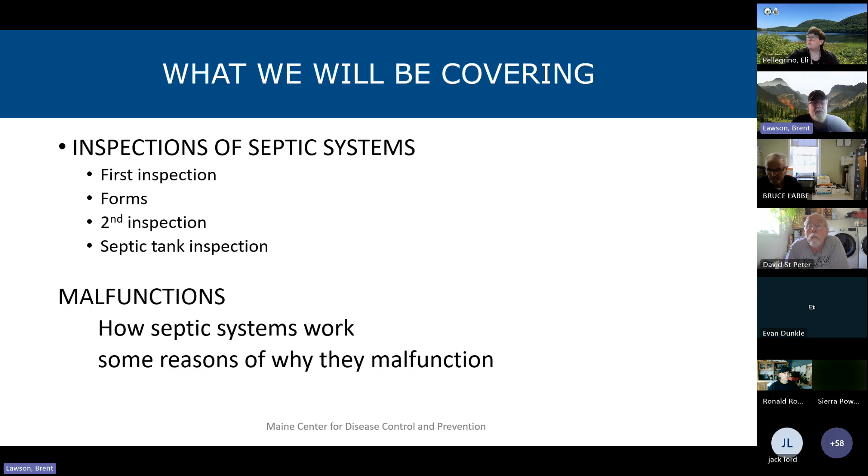But this time, the 2023 rule changes are going to be included, so that'll be a part of the inspections and installations as well. So I guess we'll get going. I guess we already went over what we'll be covering. Basically, that's what it is. There's going to be some malfunctions in here, why they malfunction, and issues like that.

So before we even get started, basically, the plumbing inspector has to be notified at least 24 hours in advance. A lot of times the plumbing inspector will act before then if they have time. There is no limit to how long a plumbing inspector can take to get to the site. And this is because of all the LUPC territories.

A lot of times the plumbing inspector that is in charge of those territories doesn't live right next door, so it takes a while to get up there. And I think a lot of times plumbing inspectors and the contractors that work in the area know this. So hopefully they notify the plumbing inspector well in advance, when they think they're going to be ready to do it. So that really hasn't been an issue. Only a couple times when contractors can't get a hold of the plumbing inspector. But we try to do our best to rectify that situation.

So, preparation for the inspection. As far as the installer goes, they've got to be prepared. I mean, they've got to offer equipment and tools for the plumbing inspector to do their job. It says that right in the rule book.

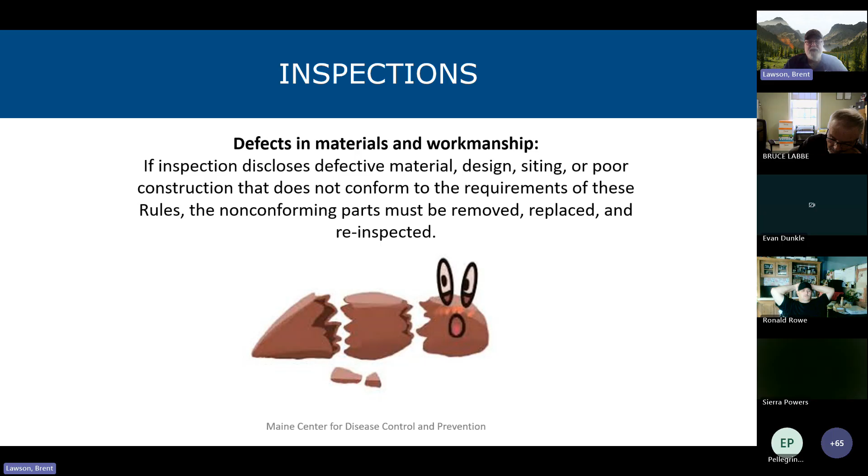So you cannot put defective materials in a disposal field, or actually even a tank or a D box, anything like that, a pump station. If there's a defect in that someplace, that's going to be replaced.

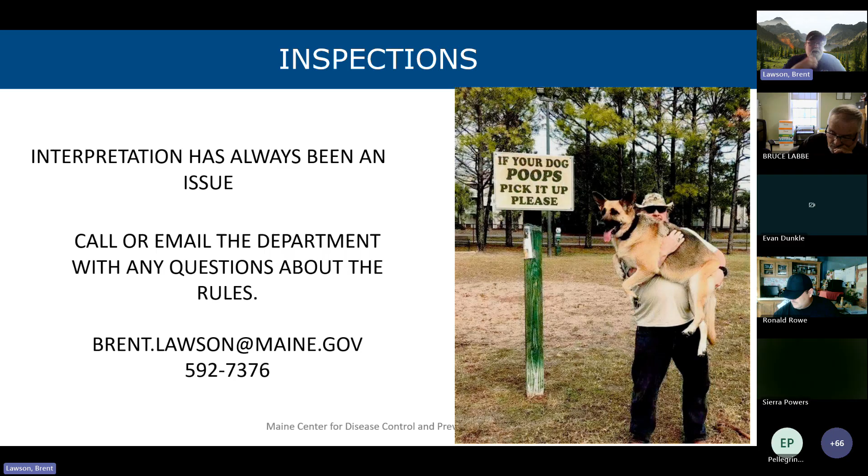So if you need clarification on anything, just feel free to give me a call, or anybody in the office a call, and that's my email address and my phone number. That's why I'm here. Feel free to give me a buzz anytime you like, and we can go over any questions that you have.

So, inspections. The LPI must make 2 inspections as follows. The first inspection is basically after the site preparation. So you've got grubbing, which is taking the grass off. And again, that has to be taken off of where the entire disposal area is going, which is the footprint, the shoulder, and the fill extensions. That all has to be grubbed and prepared.

As far as the inspections go, you do have your code book, as we all know, for what they're supposed to be doing, but you also have the design. We'll touch base on this a little later, but for instance, if the design says 15 inches of stone, but the code only says 12, you've got to inspect it according to the design. So make sure you realize that, and what the site evaluator is designing it for.

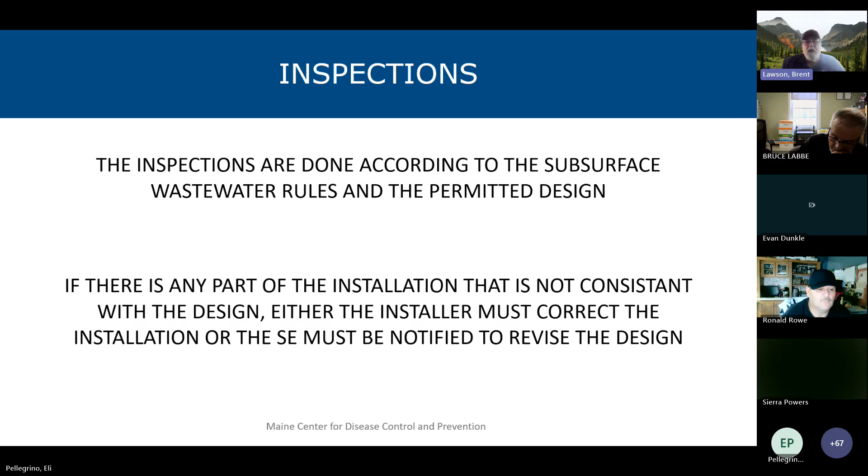Any part of the installation that is not consistent with the design, either they must correct it, or they have to call the site evaluator to revise their design. So again, just make sure you're well aware of what the site evaluator is designing according to the rule book.

Erosion control has to be put up before any work has started. John McLean at DEP has numerous dates for erosion control classes. I suggest you take one of those if you haven't already, especially the contractors, to become a certified contractor. And I think we'll touch on this later on too, but you need to take this course. We used to put out 8-hour courses, but now they're 4.

And so we require one of these courses plus a John McLean course in erosion control, and then 2 front pages of the HHE 200 form that the contractor has installed, signed off by the plumbing inspector. So those 2 certificates, those pieces of paper, and the form you fill out to become a certified contractor are what we need to put you in the database and get you as a certified contractor.

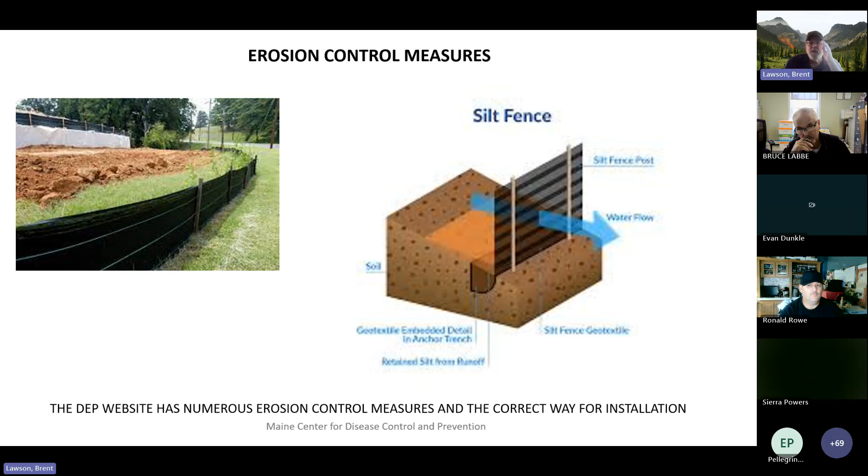Inspection. Hold on. So, building drain, which is 24 inches. Even though that's outside of the structure, that is still considered internal plumbing. There had to be a cutoff point someplace, and that's where it was. So 24 inches outside of the structure is still internal plumbing.

So as a septic system installer, you cannot go past that 24 inches because you're not a master plumber. If you are a master plumber, yes, you can go put it right through the wall of the cement or between the posts or anything.

What we're going to be trying to do is with Nick Adams, who is the lead of the Plumbers Examining Board. Hopefully sometime this summer, I'm gonna make a suggestion to have the septic system installers be exempt from at least putting it through the wall of a foundation. Because, let's face it, it's being done anyway, so I might as well make it legal. It's not hurting anything, but it's not to code. So if we get them exempt from doing this, then we'll be all set. So that's what we're going to be trying to do.

So first thing you need to do, first inspection, make sure it's permitted, of course, because you're not going to go inspect something that's not permitted because it's not authorized to start work on it. So there shouldn't be anything that you should be inspecting.

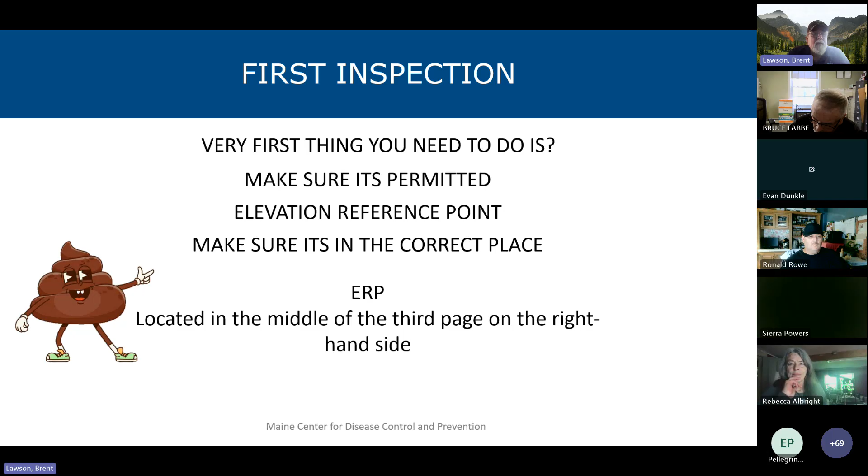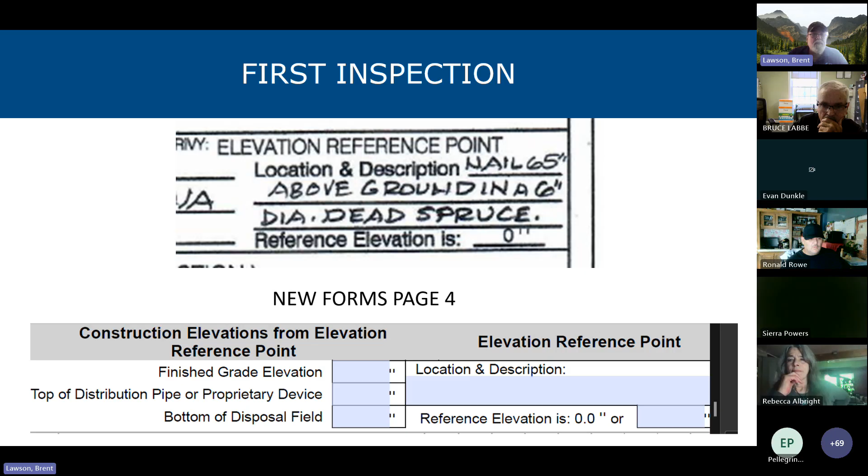We just went over. ERP is located in the middle of the page to the right. That's the old form right there. That's where it's located. The new form, as you can see, is a lot neater than the old form. So hopefully that'll be a lot easier to read. So yeah, page 4. So this right there is always set at 0.

Wherever that ERP nail is, there should be an ERP, usually a nail, and they fold a ribbon. So they put the nail through the ribbon and nail it on the tree. So that's where it is. Plus there's an orange or a pink ribbon or whatever around that tree to notify you this is where the ERP is.

All numbers above the ERP are positive. Everything below that ERP is negative. So here's your ERP right there at 0 inches. So that number right there, since it's below the ERP, is a negative number.

I've seen positive numbers before, but that was a long time ago. I haven't seen positive numbers in quite some time, which kind of screws up everything if you do have a positive number, because, I don't care who you are, unless you do it all the time, it's hard to figure out where the hell it is. So, yeah, excuse me, sorry.

But again, below the nail is all negative numbers. So let's say it's 65 inches above ground, then that ground elevation will be negative 65 below the ERP.

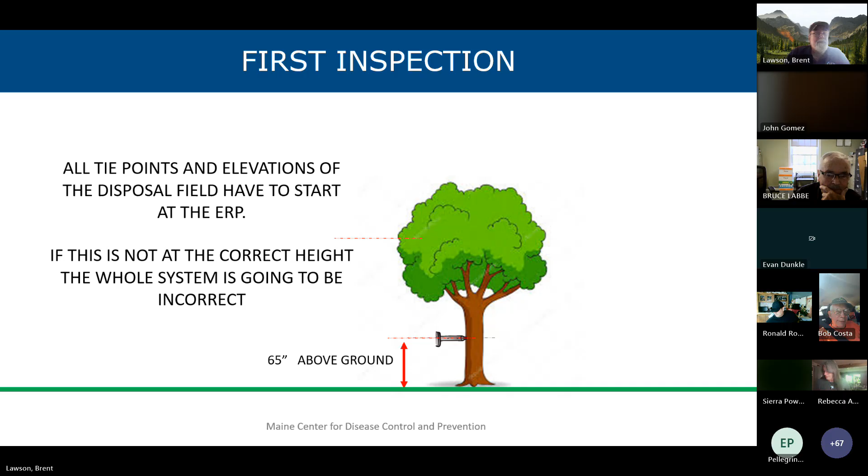So that's why you need a second set of tie points, or sometimes even a third set of tie points. Right there, with those two tie points shown before, that locks that field right into place, so you can't move it. With that third set, it's impossible to move where it's going.

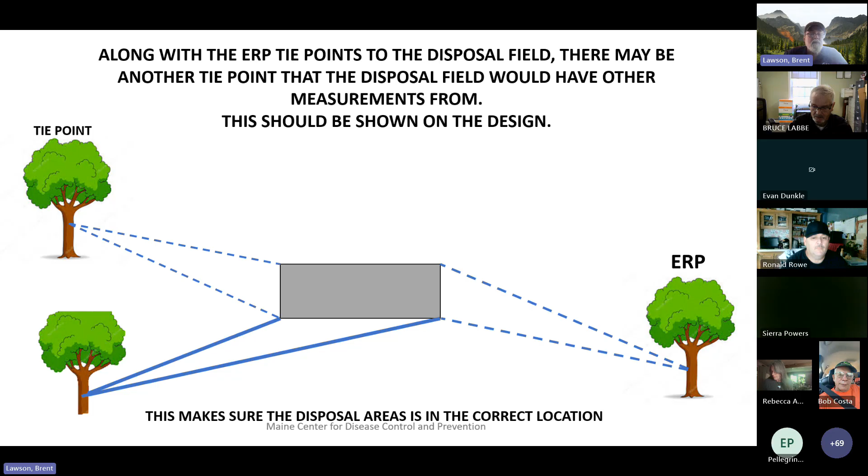So make sure those tie points are there. You know, make sure those are the correct measurements, and you should be all set.

So the first inspection. So if you have an ERP established by the site evaluator, and it gets moved, or it gets cut down, or whatever, the only person allowed to reestablish that ERP is the site evaluator that did the design. That's it. Now, as a contractor, they cannot move the ERP. They can reestablish the ERP somewhere else where it's more feasible, but that original ERP has to stay there, because that's what the LPI does the inspections on.

They won't do the inspections on the transfer of an ERP that the contractor did. It has to be done by the original ERP. So that's why the site evaluator that did the design has to go back and reestablish that, just so everything's the way it's supposed to be.

Grubbing. Any part of a disposal area, which is the footprint, the shoulder, and the fill extensions, has to be grubbed. This means all the grass has to be taken off and the soil has to be exposed.

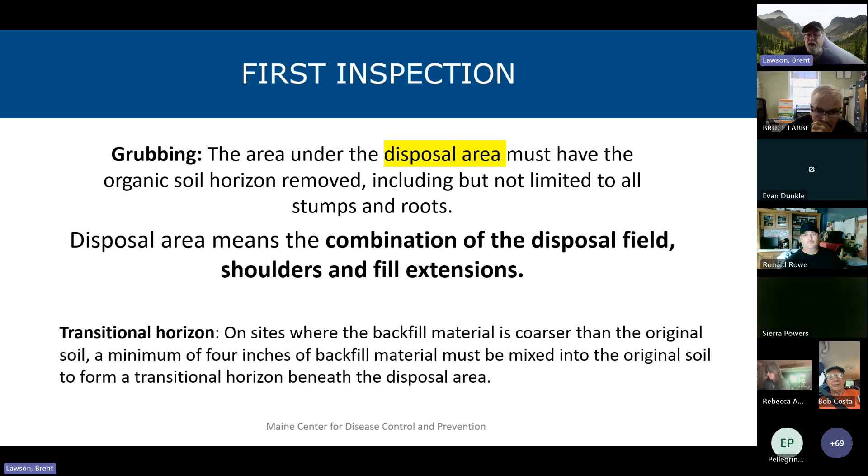To ensure installers know measurements are positive. That's right. They've got to use a plus sign. But like I said, and that's probably true, the times I run into that are very, very, very small. Thanks, John.

So, fill extensions, like we said before, also must be scarified and the transition horizon done. It's got to all be roughed up. Like John was mentioning before, if you're replacing it in the same place, all the old contaminated soil has to be removed. And so basically you're redoing the whole thing anyway, and the whole thing still has to be done: the scarification and the transitional horizon.

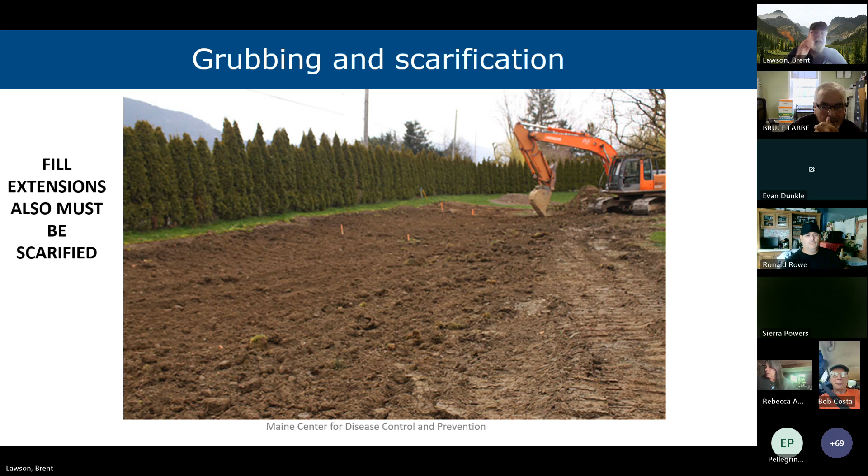Grubbing and scarification, there's another picture right there. This one, I believe, yeah, that one is not acceptable. There's way too many rocks and stones in that. A small number and smaller size wouldn't be too bad, but these are big. These are actually taking up space that the soil effluent could be draining into. And with stuff on top of that, it's actually pushing those bigger stones into the soil. So it's like driving over a leach field when it's scarified. You're compacting the soil, which we don't want to do.

Transition horizon. After the transition horizon is done, that is considered the bottom of the bed. So when you go to inspect bottom of the bed, really the transition horizon should already be done. And to find out if they're doing the transition horizon the way they're supposed to, I would just kick it around a little bit. The scarification is a big part. Now you could actually inspect the scarification, then they could do the transition horizon when they mix up everything, and then go back and take a look at the elevation. But either way, the bottom of the bed is the transition horizon after that's done.

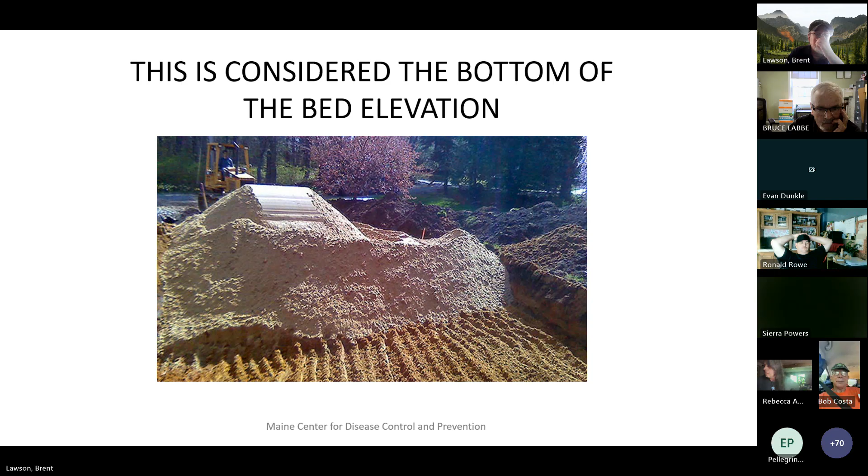Septic tanks. So if the septic design does not list scarification on it, must the SE correct that? No, because the LPI and the installer are supposed to design and install according to the code book and to the site evaluation. Just like, for instance, if the riser isn't on the septic tank in the design, they still need to put the riser on it according to the rules.

But for all the site evaluators that are watching, in the code book, it states what's supposed to be put on each page of the 200 form. I can't remember right offhand what section it is, but it says page 1, then it has a list. Page 2 has a list. Page 3 has a list. As long as all of those things, according to those specifications, are on the 200 form, the site evaluator is fine. The 200 form is also needed if you had any other notes you want done or something like that. But as long as it meets the minimum code, that's what the code is. It's just a book of minimums. So as long as that information that's in the code book is on those 3 pages, you're okay.

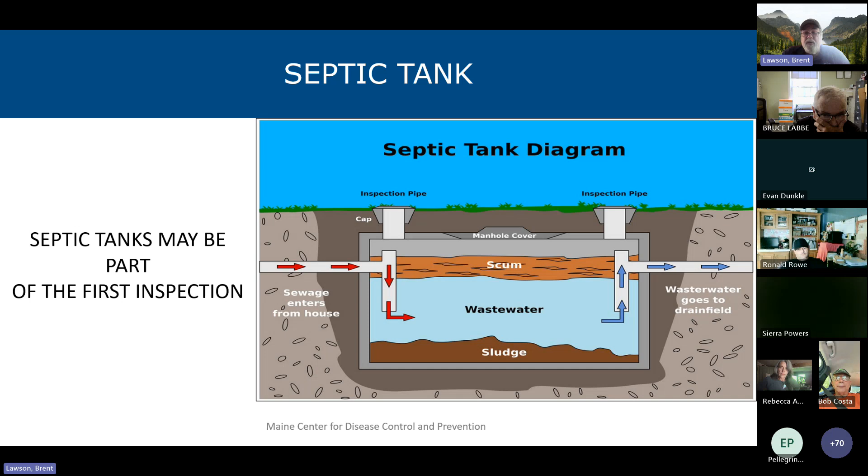So septic tanks may be a part of your first inspection. And basically how a septic system works, as we probably all know, the waste and the effluent come in the inlet, of course, go down. The tank actually separates the solids on the bottom, effluent in the middle, and the scum layer or grease on top. Then it goes out into your disposal field.

In the rule book, we have this table, which basically is your septic tank size and goes over it. So especially when you have a replacement system, if they're expanding, they already have 4 bedrooms and they have a 1,000-gallon tank there, then they've got to increase the size of the septic tank if they're expanding even 1 bedroom or 2 bedrooms, especially if they only have a 750, and especially if they only have a metal tank. That doesn't work too well now. Well, it works good if there's holes in it, but eventually it's going to rust out and you've got to replace it.

Inlet connections. This is when you, as an installer or even an inspector, have to watch out for this.

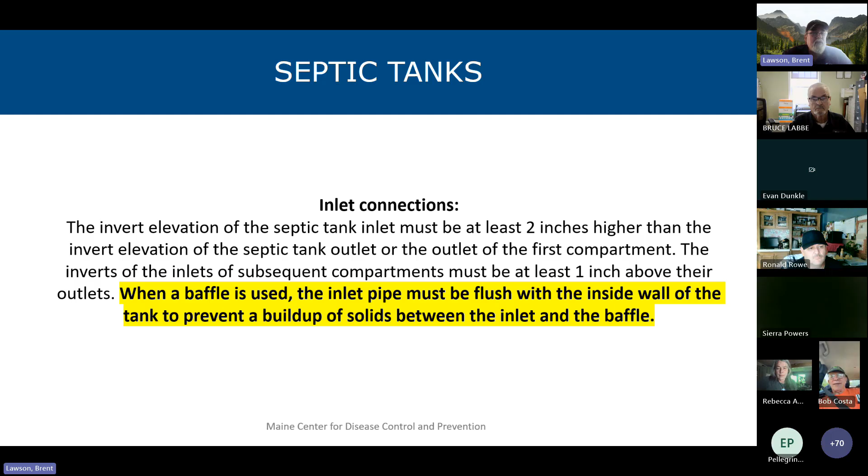It doesn't happen that often, but sometimes there's a mistake and it happens. It says in the rule book that the inlet pipe has to be flush with the inside of the septic tank. So if that's pushed in, just like that, that goes down. That's where that's stopping. That baffle is going to prevent it from going down inside the tank.

So if you pull it back to where it belongs, now, 1 or 2 inches inside the tank is fine. But if it's flush like that, then of course it has room enough to go down and slip down the side and go down the bottom. But there's been, well, not a lot, but a handful of issues where the pipe has been pushed up too close to the baffle. And that's what happens.

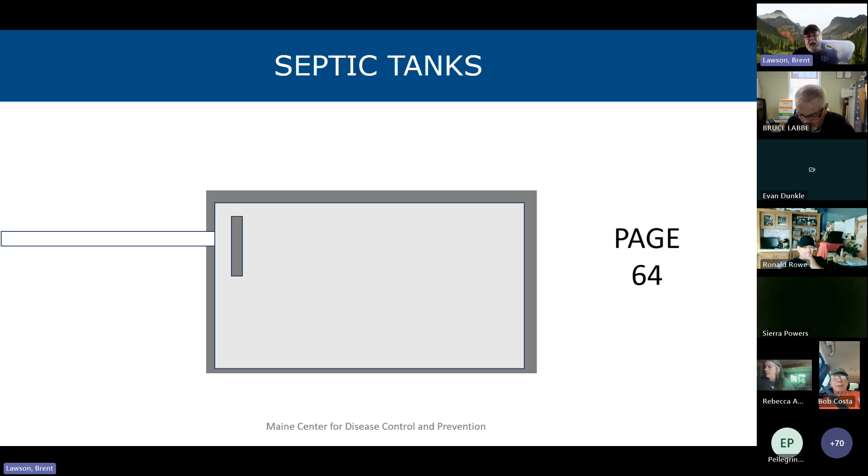Access openings. So here we are with the risers. This was a 2023 rule change. We had risers put in the rule book, at least 1 that is flush with grade, and that's mostly to find the septic tank in the first place, and so pumpers won't have to dig it up anymore. We figure by putting the riser in right at the beginning to grade, it would help a lot of people, even site evaluators, find out where the tank is, pumpers find out where the tank is.

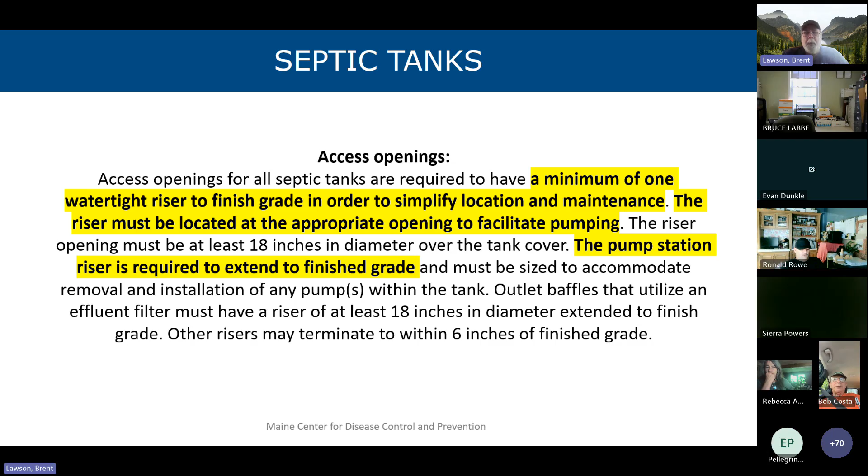So this way the pumpers won't charge the customer for digging it up because it's already right there. We got a lot of good feedback about this too, that it does make a difference. So there's your septic tank. So one riser to finish grade. Again, this is mainly to help the pumper come in and figure out where that is, put that pipe down, and there you go.

Excuse me. So, it doesn't only require one riser to finish grade. If you have a filter or a pump, then you have to have the additional riser. Just having one of them over the filter or pump doesn't mean that you can delete the middle one. Now, there's been septic tanks... oh, let me back up for a minute. Let me finish this first.

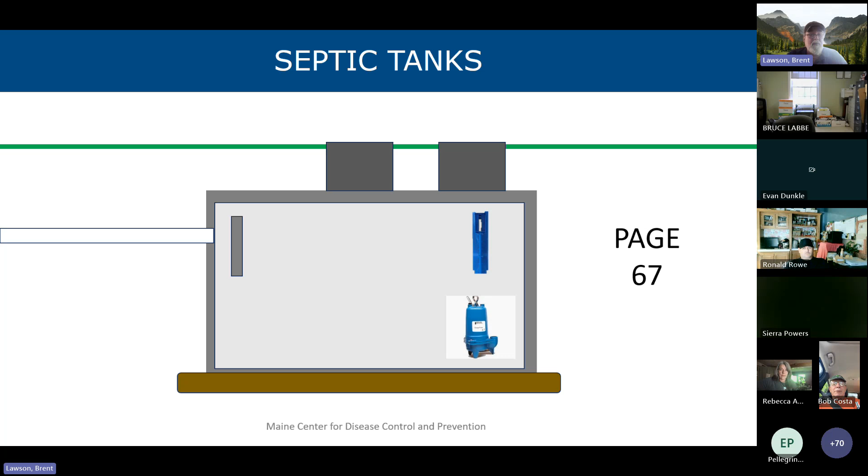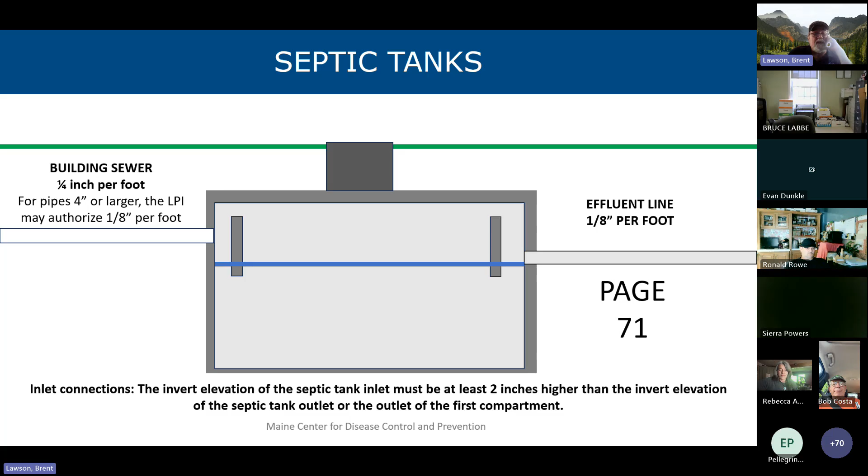So under the septic tank, you're going to have at least gravel compaction or something to make sure that septic tank stays level. Because if it's, well, I'll tell you here in a minute. If that septic tank, that's right on page 71, the effluent is level at that point because the tank's level. Now, if the tank was tilted just a little bit, not level, it's just going to go right through.

So the baffles aren't doing their job, and you're going to get a lot of solids out into either your D box or your field itself. So with installers and inspectors, make sure that tank's level both ways, side to side, front to back, because that does make a big difference.

So here we go again, building drain, which is 2 feet out. Again, unless you're a master plumber, or the homeowner can do this as well, you cannot put that through the house, through the foundation. You've got to be either a master plumber or the homeowner.

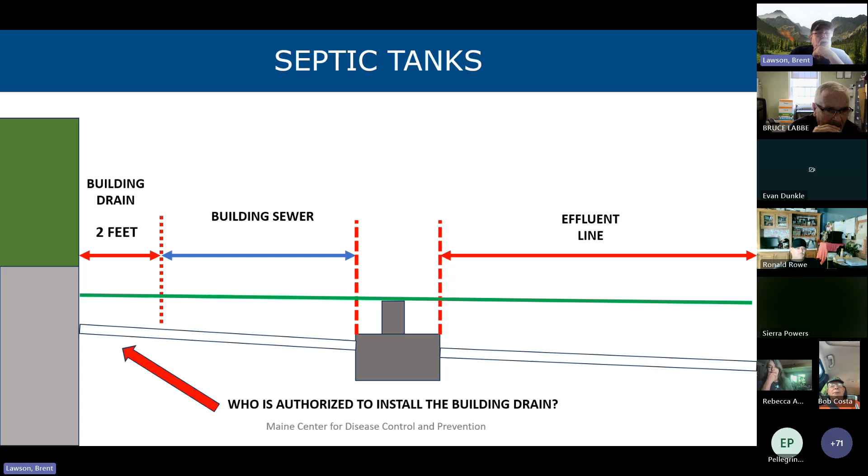So then anti-flotation. That's not as big of a thing as it used to be. They do float, as you can see right there, and there's a lot of them that have popped up. I'll have to double check on this, but I think our rule book states any holding tank on a seasonal dwelling has to be pumped out each year. So if they have a high water table in the first place and they have to be pumped out each year, they're going to have to be tied down.

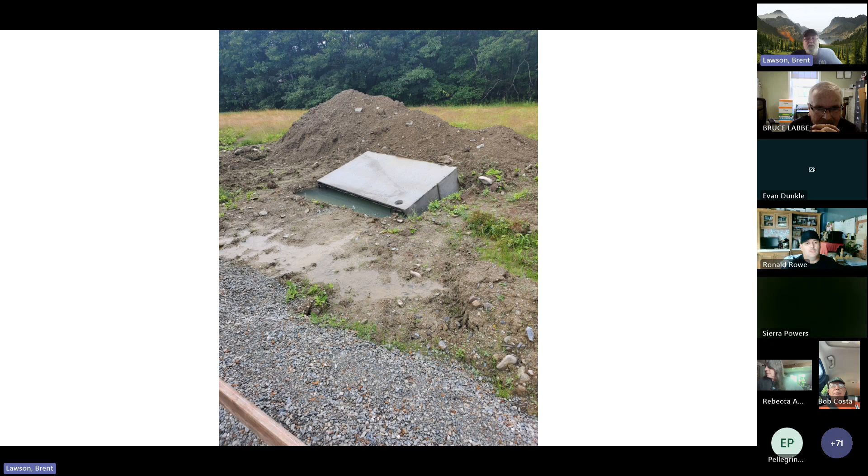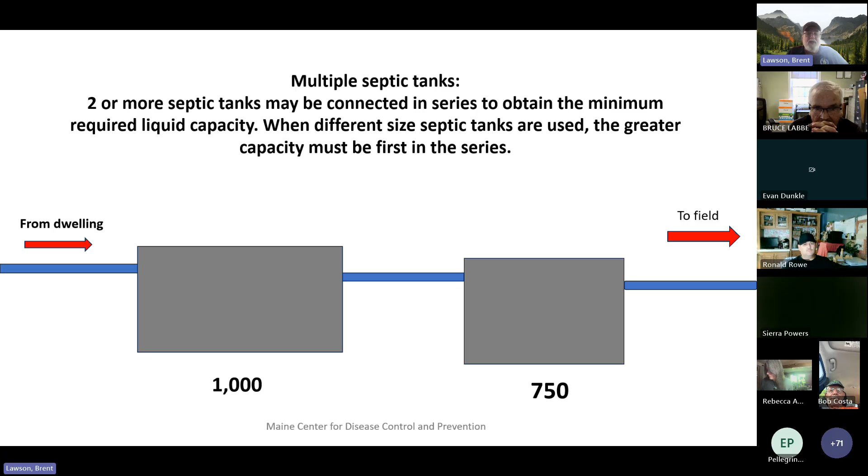If the structure only has a 750, then that either has to be replaced and a 1,000 put in its place, or, in a situation like this, maybe you can put a 1,000-gallon tank in and be done with it. But the 750 has to come last. The 1,000 has to come first because that's going to collect all the solids, at least most of them anyway.

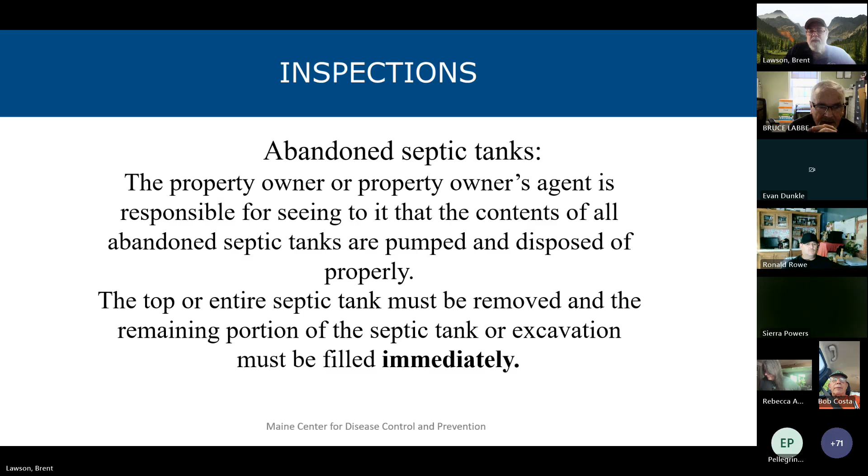Abandoned septic tanks. As far as those are concerned, first of all, they have to be pumped out, then either crushed or exhumed from the property. Usually that's too much work, so usually people pump it and then crush it like this, and then fill it with backfill material and make sure it's compacted. We do not need any kids or pets falling through a septic tank. This is why this has to be done.

Or on occasion, people have backed over them when they're not being used anymore. Or even when they're being used, they've backed over them and gone right down through it. So if this is part of your design, that you're replacing a complete system, it would be very helpful to put on your site evaluation to make sure the existing septic tank, if it's not being used, is properly abandoned. And that'll take care of that.

That'll cover you, and that'll cover the plumbing inspector, because when he goes to inspect it, he has got to make sure it was done before he signs off on it, because that's on the design. So that would be very helpful. So your first inspection is now concluded. Are there any questions about a first inspection or the installation of a system at all, as far as the first inspection goes?

Well, since that's all done, that's fine, but usually a repair wouldn't be considered a whole row. A repair would be more of maybe 1, 2, or 3 infiltrators and maybe a section of pipe or something like that. If it's over and above that, I would feel that they would have to call the site evaluator in.

And if the site evaluator isn't around anymore, they would have to get another site evaluator to do another design just to make sure everything's still the way it's supposed to be. How old was the system? Do you know? Oh boy, I don't remember, but fairly old, because it was back when plastic infiltrators were fairly new. And I guess some of those had been recalled at some point. We think that's why that row collapsed.

Yeah, probably. I bet you that's what happened. But I mean, now that it's already done, if they got it back up and it's working fine, then that's okay. But I would say just keep in the back of your head what a repair really is.

How many rows was there? Do you know? There were 3 rows originally, only 1 was replaced. The others all seemed okay. And the soil was dry as a bone. I don't think it was going much past the first 2 anyways. Yeah. But that's 1/3 of the whole disposal area.

So I would say if it happens again somewhere else, I would just have a site evaluator called in just to make sure it's still, for lack of a better term, in line with today's rules, like the soils and all that stuff. I mean, who knows what they designed back then? Did you have documentation of it? Oh, yeah, I have the original design. Okay.

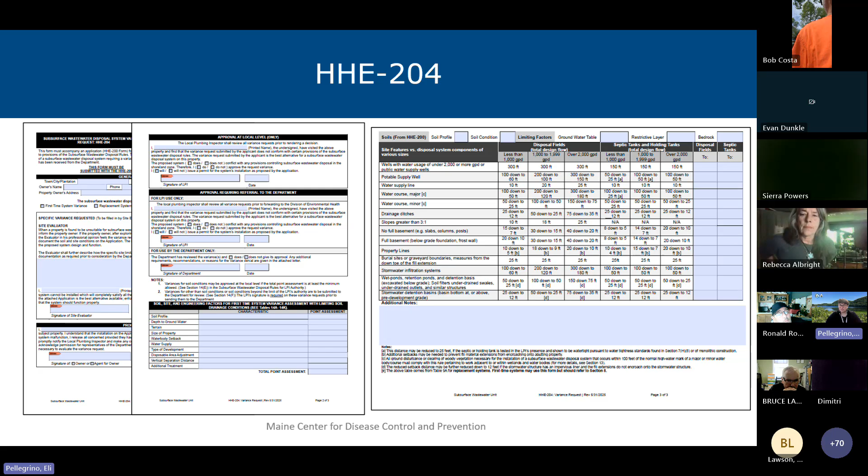This is the new front page. Some of the things that we changed in here, we added an email line, which didn't exist before. And I think all of the other information was previously in here and it just got a little bit reformatted. This section for noting why the variance is being requested was increased, so there's more space to add notes. And that was pretty much it for the first page changes.

On the second page, we reformatted these a little bit. The prior form had just kind of like 3 boxes, and we felt like it didn't differentiate between just an LPI variance and an LPI and state variance enough. So we added the black headers and the boxes to try and format that a bit more. The information in those boxes didn't change much between forms.

The main thing that did change on page 2 is just references to the rules. With the 2023 rules, things had to be restructured, so a lot of the section numbers changed, so they were no longer up to date on the old form. They've all been updated. They all now refer to the correct sections.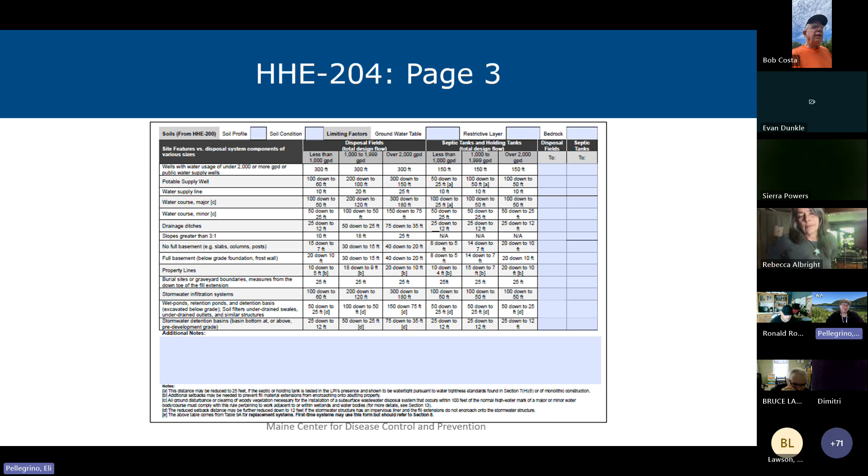And then this is the third page. This is entirely new, but also, like I said, kind of old. This section, the setbacks, that's all just pulled from the rules. It was just formatted to fit onto this page. Again, all of the references to the rules in the notes area have been updated, and there's a nice big box for adding any additional notes.

Any questions on the 204 before I move on to the 200? There pretty much never are.

So the 200 has changed more than the 204 did. Essentially, we've taken the old first page and split it in 2. The new first page is really more information gathering on the property owner, the property, and the information that you would need to charge the permit. And we'll get into the specifics of these on the next slide. This is just an overview.

Page 2 is more of the information on the actual septic system itself. That's pretty much all the stuff that was at the bottom of the old page 1. And then pages 3 and 4 are largely the same as old pages 2 and 3. You can even see that they're pretty much the same. It's just a little bit of reformatting, trying to make those boxes bigger. But otherwise, the information on these pages didn't really change.

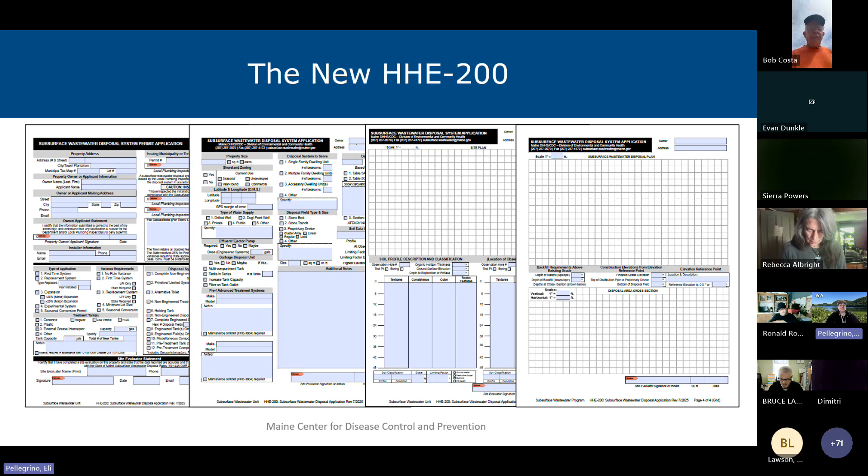One of the larger changes that we made for this form was adding what we've been referring to as alternate page 3. If any of you have ever filled out the engineered permit form, then you're familiar with the front page of that, which is basically like a checklist where you, as a site evaluator, would affirm that you've attached all of these pages with all this information to the front page of the permit. That's basically how this alternative page 3 functions as well.

It's a checklist and a couple of information gathering boxes so that you can attach larger site plan drawings to the form and essentially affirm that you have all the same information. And we'll get more into the details of that in some of the slides, but we also created just a blank page. So you could use this whole page to do your site design rather than just the small box on pages 3 or 4.

Now going into the details a little bit, this is the top of page 1. A couple of things that we added include the house number for the permit. This makes it a lot easier to find things in our database. So we created a box just to try and promote actually adding house numbers, which some folks do, some folks don't currently.

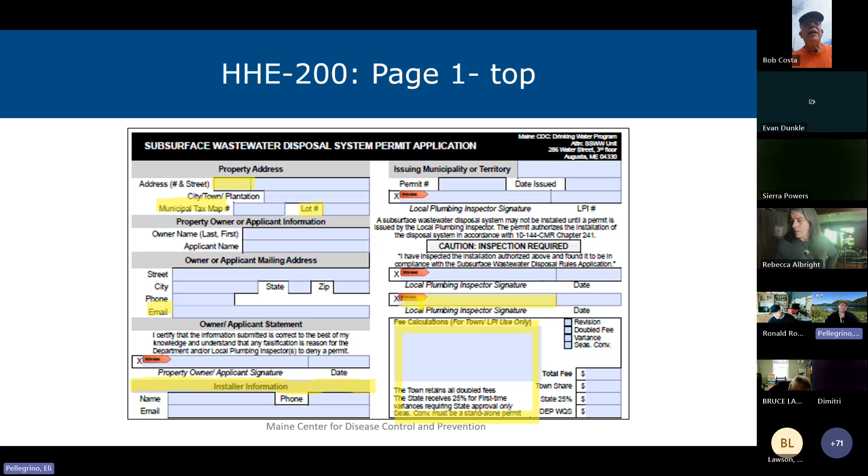That's the main changes for the top of the page. One thing I forgot to mention is that our address is now in the top right corner. This is our correct address. This is where you should mail your permits to. Prior to now, that hasn't been on the permit, and sometimes submissions go elsewhere. So that was a really big, useful change.

Going down to the bottom of the page, we have kept a couple of system-related things in this section. Type of application, variance requirements, and treatment tanks are all here, as well as the disposal system components. In the type of application, we just added minor and major to the less than 25 and more than 25% expansion. We didn't change the variance requirements section at all. And in the treatment tank section, we changed it just a little bit.

We've added total number of new tanks. We've been seeing more and more permits where more than 1 tank is being installed at a time. For pricing, that changes things. And it was sometimes hard to tell how many new tanks were actually being installed. So that's why we've added this box. And we've also added a larger notes box for any tank related notes and a little checkbox about the risers.

On the disposal system component side, a general trend that you see in this section is that we added a new box to specify the total number of new tanks. Again, this is to help with the fee calculation for the town and the state. So if you were just installing a complete non-engineered system, what this would look like is checking off 1 and just writing 1 here. If you were installing the system with 2 tanks, you would check off 1 and write 2 tanks.

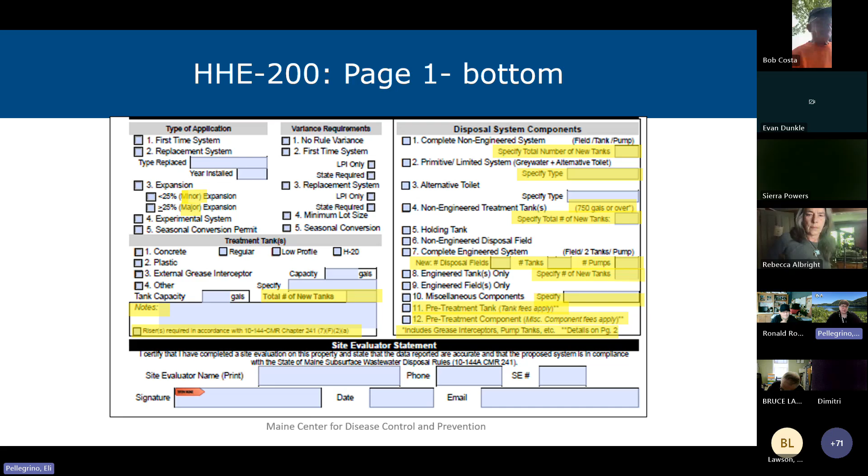This is the top of page 2. Aside from formatting and kind of repositioning these fields, nothing really has changed with most of these other than adding a little bit more space whenever there's something to specify or calculate. I will say one of the other changes that is going to be on the little revision that we put out this week or next week, you'll see here it just says load. We're going to make sure that that says H20 load. And this says linear feet. I think that there was another spot in the form where it said square feet instead of linear feet, and that's been corrected.

Looking at the bottom of page 2, there are more changes here. So we have a nice large additional notes box. One of the thoughts behind adding this box here was that we see site evaluators who hand draw their systems writing notes in the kind of gridded areas of pages 3 and 4. And over multiple rounds of scanning through the town and the state, sometimes those get a little difficult to read. So we added this box so that there's another place to put those notes that will kind of live longer through rounds of scanning.

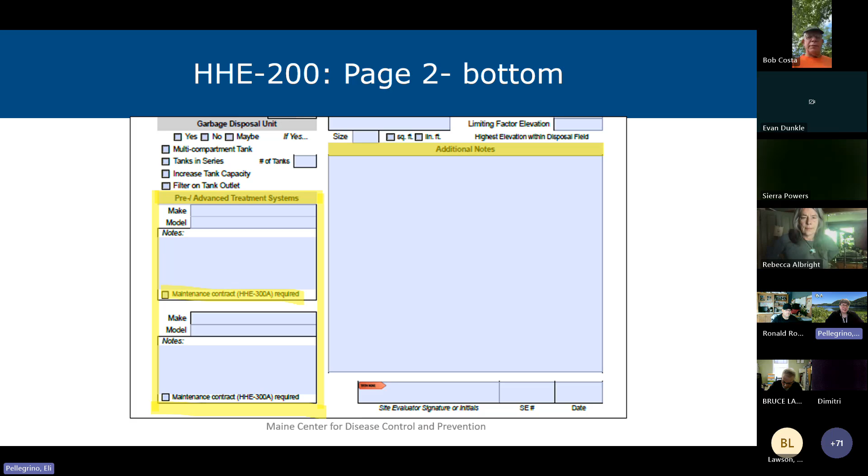Additionally, at the top of all these pages, we've added an owner and address spot just in case things get separated. But that's, you know, pretty simple. And if you're using the PDF, those will autofill once you fill them in the first time. I'm not going over pages 3 and 4. Like I said, they are very, very similar to what those old pages used to look like. So there's just not much to go through. But I did want to go through alternative page 3 a little bit more.

So again, we have the check boxes here. They are for things like the site location map, the site plan, soil profile description, disposal area, cross-section, backfill, ERP, etc. Some of those checkboxes refer to things that are just on this page. So you would just fill out this section and then check that box. For other ones like the site plan or the site location map, those are things that you would be drawing up and attaching to the permit. So you would have those pages done, you would staple them to the permit, then you would check that box. So that's how those checkboxes are meant to work.

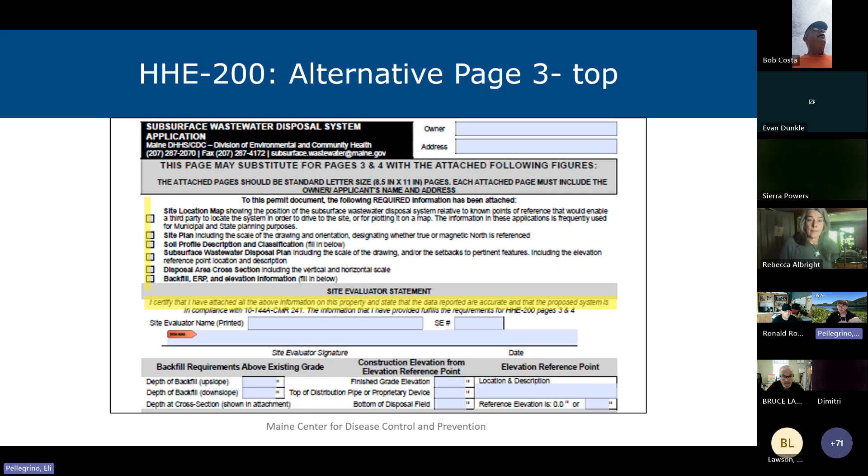And we added a site evaluator signature spot here. The language that's above it is very similar to the language that's on the first page. It's basically just saying that I, as the site evaluator, affirm that I have attached all of the information that is required of me. And then they print their name and sign it. And then here's the bottom of that page. Again, these are just sections that are pulled from pages 3 and 4 directly.

So I see that there's a question. If someone is proposing to add a pretreatment component to an existing tank instead of doing an extension to the leach field, is that allowed? Does the site evaluator have to be involved, or can it be permitted on the HHE 200 as a pretreatment component? That is a better question for Brent, I think, just because it's a little bit more technical. If you're asking me how much it costs, I could tell you. But I'll let Brent answer that.

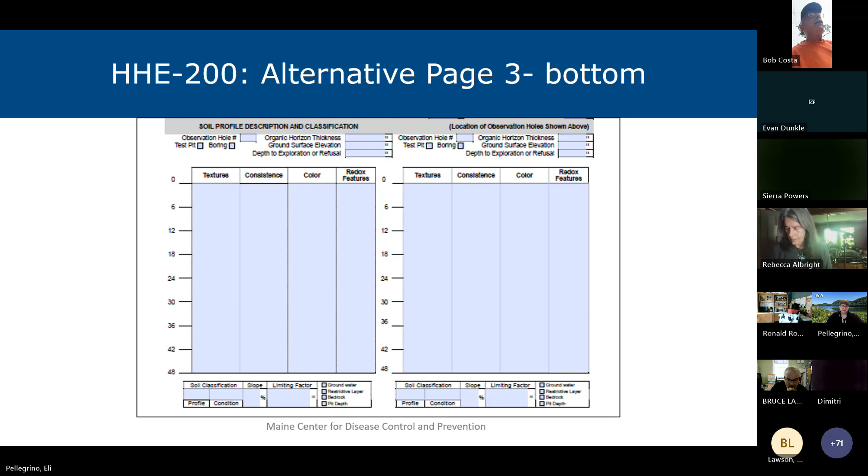A couple of frequently asked questions that we've gotten on this form. The state isn't requiring that anyone switch to these forms before 2028. After January 1st of 2028, permits can no longer be permitted on the old form. So if a permit was designed this year and the property owner didn't get that application permitted until 2028, then that design would need to be put onto the new form.

So we are encouraging everyone to switch over sooner rather than later, but it's technically not required until 2028. We also picked 2028 because any systems designed in 2025 shouldn't be affected by this. A couple of quick no's. You do not need to reapply or resubmit any existing permits onto the new form.

Fees have not changed. The internal plumbing permit 211 has not changed, and the replacement tank permit 200A also has not changed. It's just these two forms. And I covered this already, but with the installer box again, that's really meant more for town use, and it doesn't have to be filled out. It's just meant to make things a little bit easier for the town.

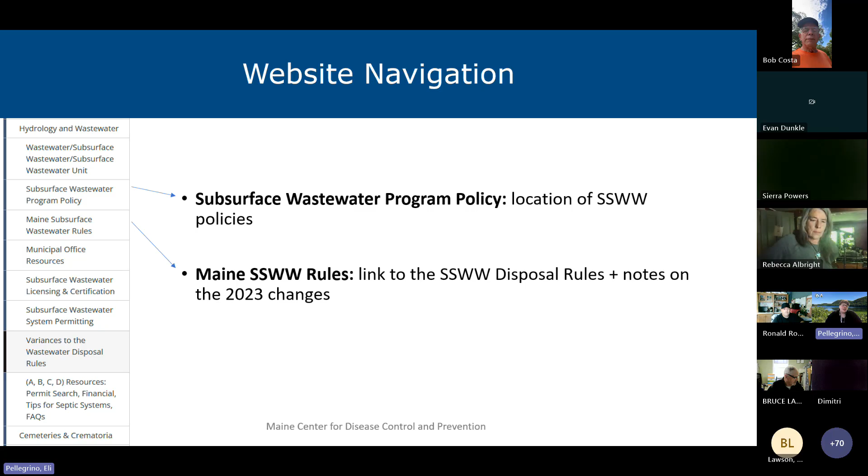Pages that you are probably more likely to go to is our policy page, which is where we upload any policies that are related to the subsurface wastewater rules. And then this next page is a link to the subsurface wastewater disposal rules. This is the official link for the state. And this page also has some notes about what changed in 2023. These pages are probably the two that you are most likely to visit and that are most likely to have useful resources for you guys.

So the first one is the municipal office resource page. We built this with town clerks, town administrative staff specifically in mind. It goes over what is required for permit submission, but it also has a list of all of our forms and documents. So the permits that I've been talking about are on here, as well as the HHE 200. All of that kind of stuff is on this page.

And then the subsurface wastewater licensing and certification page has information on all of the licensing and certification processes that we oversee. We've recently reformatted it, so it should be a little bit easier to navigate and to read. In addition to that information, we have lists of all of the active site evaluator, installer, and inspector licenses and certifications, as well as a list of all of the active LUPC LPIs for the different territories.

And then at the very bottom of that is our training schedule. This is where this training was linked, as well as all of the other trainings that we've been doing. And that's also where you're going to find the recording of this. And I think I dropped that page in the chat a little bit earlier, if you were to scroll up.

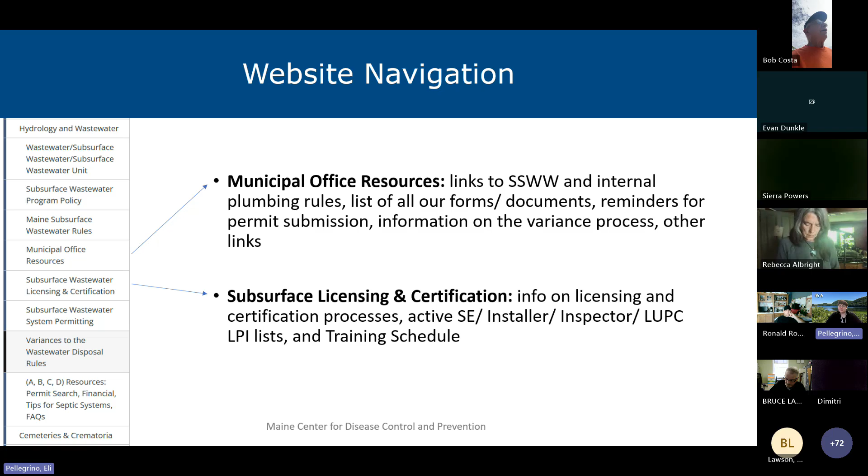And one quick note on the installer certification. When we were redoing this page, we changed this a little bit. It used to be a full 8-hour subsurface training session. We just don't really do 8-hour training sessions anymore. So we've changed it so that it's now just a 4-hour session like this training, plus a DEP erosion control course. And I believe recertification has not changed.

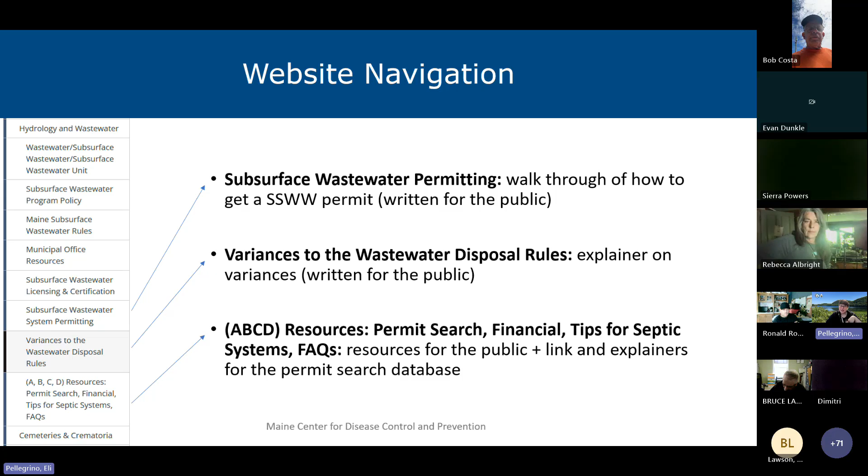And then the last 3 pages are really meant more so for the public. Subsurface wastewater permitting and variances to the wastewater disposal rules are more like walkthroughs for the public, homeowners who are trying to get this stuff done for their houses. And then our last page is just a resources page. Most of it is FAQs for homeowners, tips for septic systems, but at the very bottom of that page is where our permit search is.

So the last section that I'm presenting on is the permit search database. We've heard from some folks that this new database can be a little bit difficult to navigate, and I totally understand that. This database, I think we've been using for about 2 years now. I think that this database is better than the prior one, because with the prior one, sometimes you would look things up and the permits would not be available, which is not a problem that we've had with this database. The problem is usually more about finding them.

I see that there's a question in the chat, so I'm just going to pause. Is there a place to look up contractors/installers to make sure that they are certified? There is an installer list on that licensing and certification page, and you can look up whether their certification is active or expired. But in most cases, the state doesn't require that installers are certified. Actually, I'm going to pause. That might not be true. I might have that backwards. I'm just going to the website to double check.

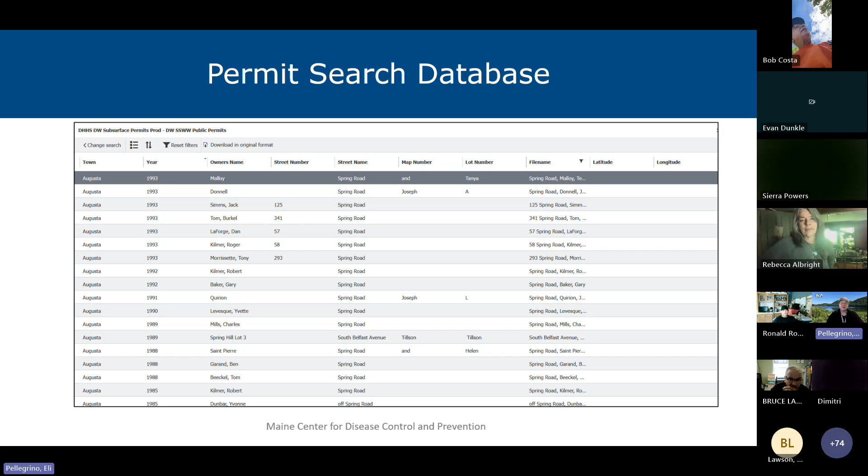So let's say we have then hit apply, and we have a good number of permits that came up; they're mostly on Spring Road. We could narrow this down even more. In most cases, you're probably going to get less than 20 permits show up, in which case you could just go through all of them. But if you have additional keywords, something that you can do is Spring and the property owner's last name. In this case, it's Spring and Malloy. And again, we're using those asterisks on both of those words.

We use and here. It tells the database that we are looking for a file name that has both the name Spring and the name Malloy. You could theoretically do Spring or Malloy, and that would bring up anything that was probably on Spring Road, or anything that has a property owner whose name is Malloy.

A couple of things that I find really helpful when looking for permits in this database is just remembering that they are filled out by people. Names get misspelled, roads get misspelled. Sometimes people will name their driveways like it's a road. So instead of just having the main road, it will be like Smith Drive. And a lot of these permits, not all of the identifying information gets filled out, especially the older ones from like the 70s to 90s. Most of them don't have house numbers.

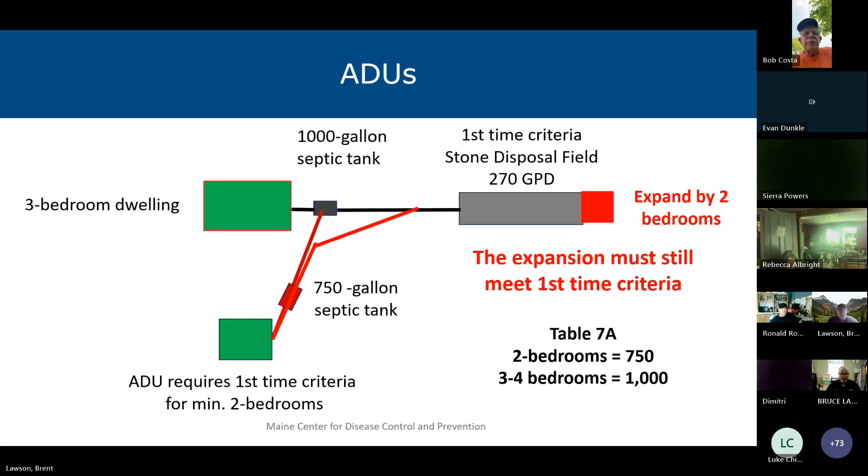So let's say it's not first time criteria anymore. That existing system was under replacement criteria. Can you hook that accessory dwelling unit to that field? One of the questions was, can they reduce the house to a 2-bedroom, then use the existing tank? That's completely up to the town and up to the assessor, what they want to do. If they can go backwards from a 3 to a 2-bedroom, then maybe they could do it that way.

So you got replacement. Yep, Brent, go ahead. But you're up to a 4-bedroom now. When you have 2 2s, that's a 4-bedroom. That's right. Okay. So you couldn't use that system if it was only a 3-bedroom. That's right. What he was asking, if you could reduce that 3 to a 2-bedroom, yes, you could do that. But you still have to expand the system though. Yes, you still have to expand the system.

And I just thought of this as well. It says in the rule book, each dwelling unit has to have their own tank. So that would say to me, each dwelling unit would have to have at least a 750. So that still puts that up to a 1750, a 1500, if you wanted to do it that way. If I understand that right.

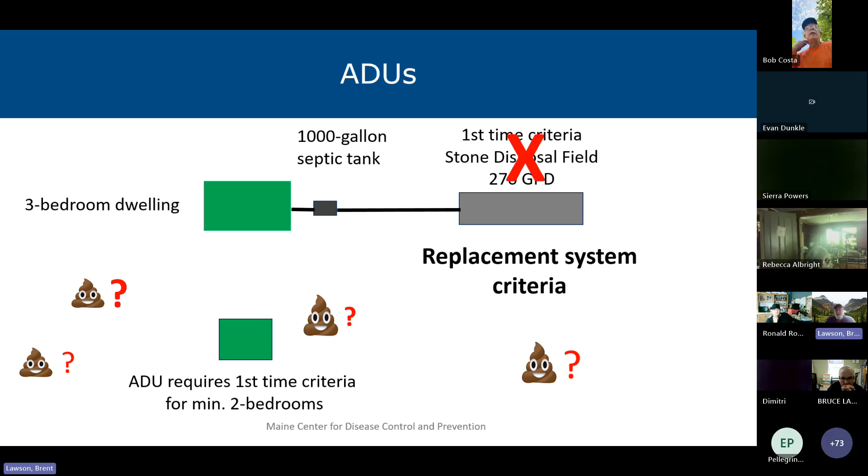As a site evaluator, you can do whichever one you want. But if you are going to do an adjusted design flow, at least another bedroom added on just to protect everybody. So yeah, that slide right there, if it doesn't meet first time criteria, you're going to have to find a place for that ADU to hook into.

So let's say the distance to a water supply is the only thing that's getting in the way. Remember, there is a table 8A in our rule book that says if you have a certain amount of casing, you can get closer to the disposal field. This is like a sleeve. If you put a sleeve in a well and get down to the feet you need, that's fine. And that's not a variance, because that table is part of the rules.

So let's see. If you have a system like that and you got a well, and right now that system is 100 feet away from that well, and the only way you can expand is on this side, that brings it to 80 feet. You can use that table to get enough casing in there to make 80 feet. And basically that would be considered a first time criteria. So that would work if you could do it that way.

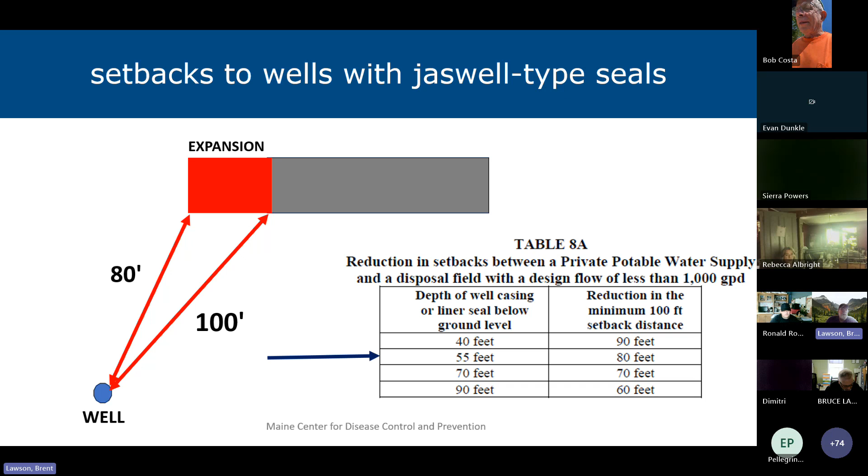Let's see. So, second inspection. Your system components are as follows. You've got your tank, your disposal field, your shoulder and fill extensions. So basically, you have that little area 2 feet out from the house, which is internal plumbing. Then you have your septic tank and your connecting pipe. Internal plumbing is called the building drain; after that, it's called the building sewer. Then your septic tank and your effluent pipe.

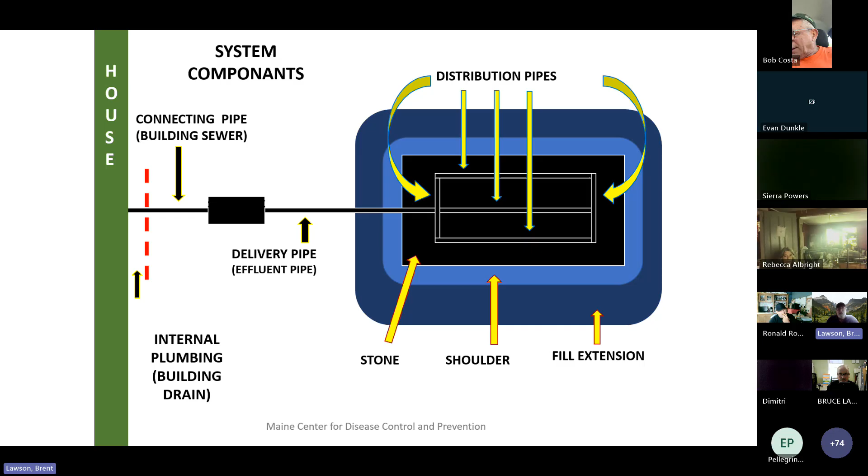And then we've got your distribution pipes, stone, shoulder, and fill extension. So there's all your parts. And as far as, again, covering the system, no part of what you see there should be covered before it's inspected at all.

No part of a structure should be on any part of a disposal field, as you can see. Fill extensions, shoulders, stone, everything. Loam, as far as 4 inches of backfill and 4 inches of loam over that after you're done. There is no inspection for that unless you, as a municipality, have a third inspection.

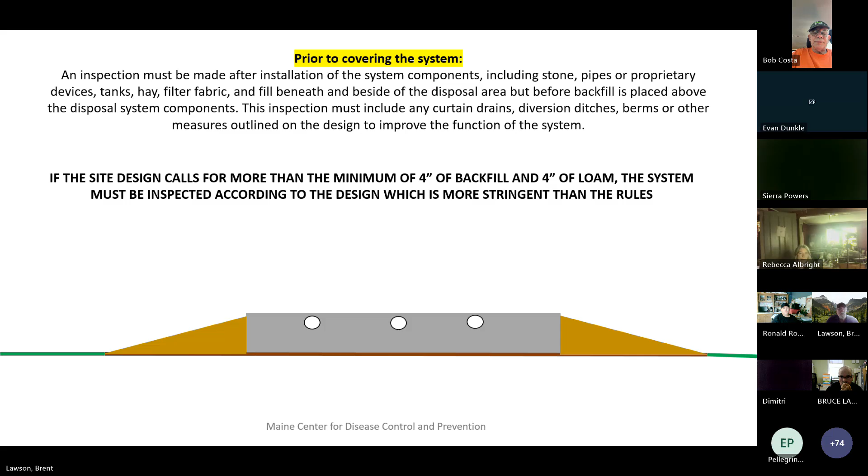Whoops. Oh, uh-oh. What did I do? All right. Here we go. Do that, do that, do that.

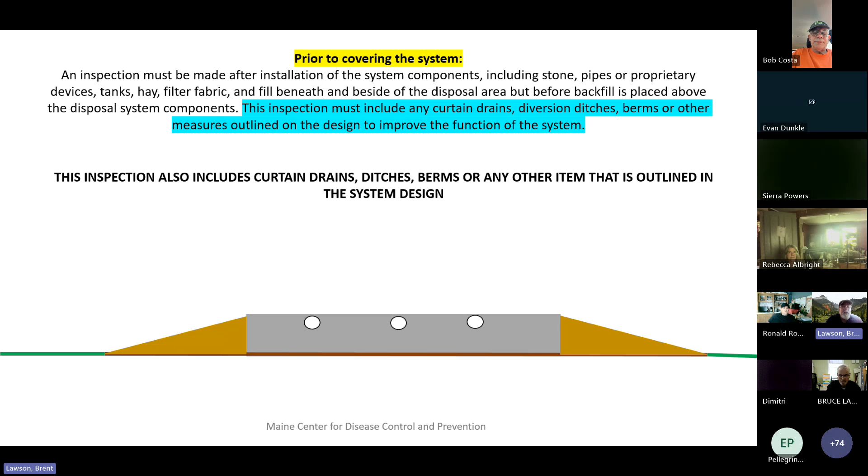Again, prior to covering the system, if you used like 1.5 inch stone in the stone bed system, excuse me, and the site evaluator, well, let me see in the chat, what is the minimum amount of stone according to the code book that you can use in a stone and pipe system? Well, yeah, 3/4 is right, but the minimum thickness is 12 inches. So if a site evaluator puts that he wants 14 inches of stone, do you inspect it by the design or by the code book? That's right, the design, because the code book is the minimum.

The site evaluator can put as much stone in there as he sees fit, or backfill, or loam, or anything like that. So just remember, when you're looking at the designs, it's not just, okay, 12 inches of stone, as long as they have that, they're all set. If they only have 12 inches of stone and the design calls for 14, you're not inspecting it the way you should be. You've got to make sure it passes what the design says. So again, you've got the imaginary line where the ERP is, and all these measurements that are above. You've got to make sure all that lines up.

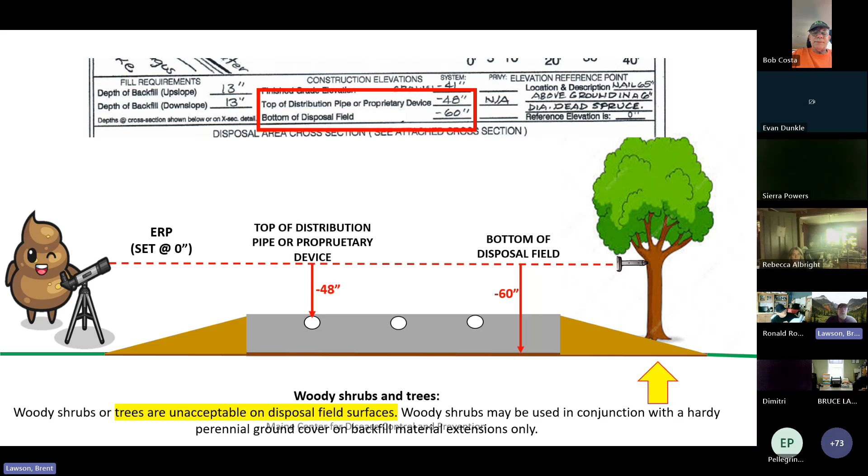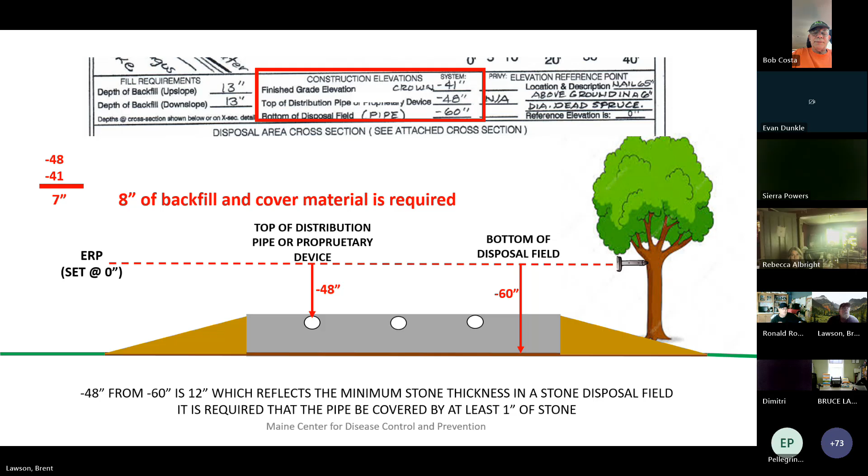Let's see. I already did that. That's just the measurements. Filter fabric. There is no more hay. As of 2023, hay was deleted from the code book.

Too dirty stone. I don't have any pictures for too dirty of stone, but I know I've asked a couple contractors to run their stone through sieves to do the sieve analysis to match the table that is in the code book. And to my eye, it was very, very dirty stone. So I didn't think it would pass, but it did pass.

So you have every right to have whoever, the contractor or the homeowner, run their stone through a sieve analysis to make sure it passes. That's great. But I've seen really, really dirty stone, and it has passed before.

What is the tolerance if the horizontal ties do not jive with one another? Now, what do you mean, as far as the tie points on the design? Let's say it's 75 feet and you come up with like 80. Is that what you're talking about? David?

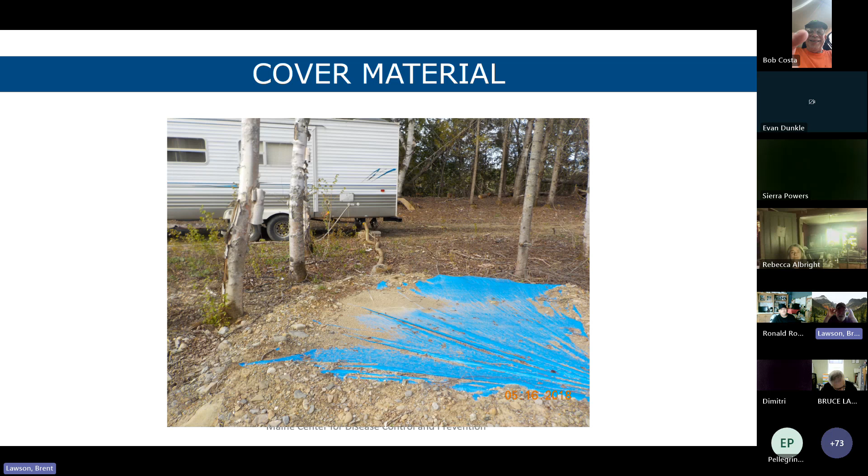Let's see. Cover material. This is not good cover material. If this was probably either black or camouflage, it might be okay. But blue tarps are not allowed. Sorry. Doesn't work very well.

Let's see. Oops, I'll go back. So the installer is responsible for basically everything. The installer is responsible for putting it in according to the design. The installer is responsible for backfill material. They're responsible for the actual 4 inches of backfill material on top of the field and the 4 inches of loam amendment mix to put on top of it to grow grass.

Now, we all know that a lot of places do not have 3 inspections. They only have 2, which is the bottom of the bed, top of the pipe, or proprietary device. And that's why we have this in there, that if maybe within a year or so, the rain erodes everything on top of it because there's no mulch or stabilization, then it's the contractor's issue.

Unfortunately, the only way to rectify that 9 times out of 10 is a civil lawsuit between the homeowner and the contractor. There is that 1% that the contractor does come back and fix it, which is great, which is what they're supposed to do. But a lot of times it's a civil lawsuit, which is too bad. But yeah, they are responsible either way. It says right in the code book. And so that would take care of that, hopefully, if something happened.

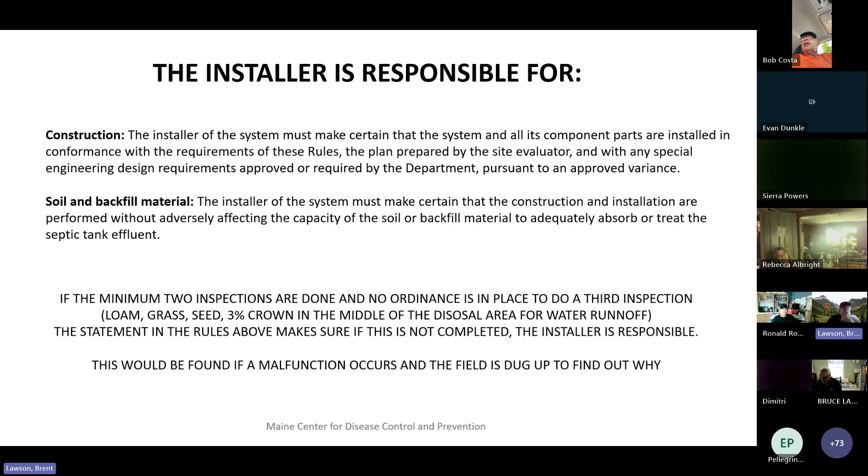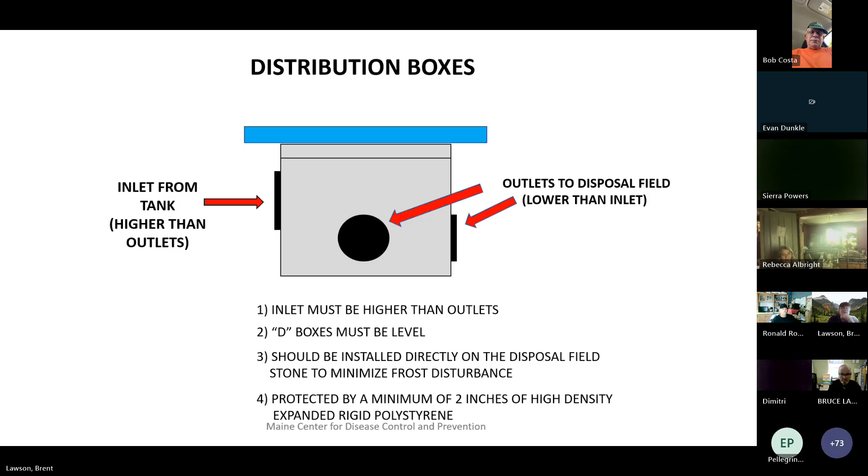Distribution boxes. Of course, we all know the inlet is higher than all the outlets of a D box. So make sure that they are not put in backwards, which they have been before. And it doesn't work that well if they are put in backwards. Normally, this looks so good. Pump system. Pump comes up to an elbow, faces towards not an outlet or a pipe inside the D box. That's good. That pump line should be below frost level all the way to where it's pumping from.

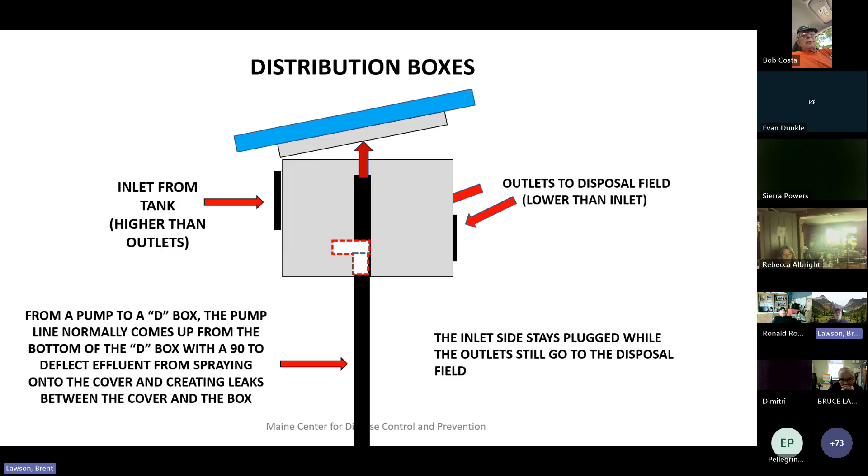And we've had problems in the past. If you had not the pipe, it just went right straight up and everything comes out when it turns on. And it all leaks out all over the place. And the pumps that pump effluent up into a D box aren't really that pressurized. It's a low dose, but when they get full and that starts going and that cover isn't secure tight with the insulation on top of it, it does come out and it ruins the whole thing.

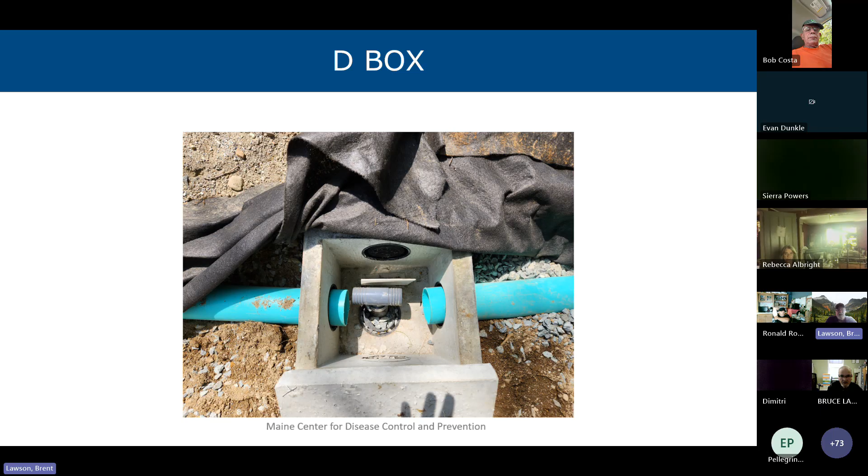Something like this, again, is not good either because that T is faced to both pipes. So it's going to shoot right down each one of them. So if they had that same issue with that T on it, I would turn that T a little bit just so it doesn't go down into the pipe, or just put an elbow on it facing not in that same direction.

D-box is usually placed on the stone so it doesn't heave. But it's good to have that 2 inches polystyrene insulation on top of it anyway. Well, it doesn't say just D boxes. It states that everything has to be frost protected, no matter if it's the line, if it's a D box, anything. It's got to be frost protected in one way or another, mainly 2 inches of polystyrene insulation.

Oh, I want to make that point too. If the design states D box or T, it gives the installer the choice of either one. And when you go there and it does say D box or T, then you got to approve it. Now, if it only says D box and there's a T involved, that's got to stop right there. You got to call the site evaluator back because evidently he wanted a D box there and not a T. Now, as long as the site evaluator revises it, then they're fine. You're all set. That's why it's good for the site evaluator, if it's okay with him or her, to put D box or T, then it doesn't really hold anything up.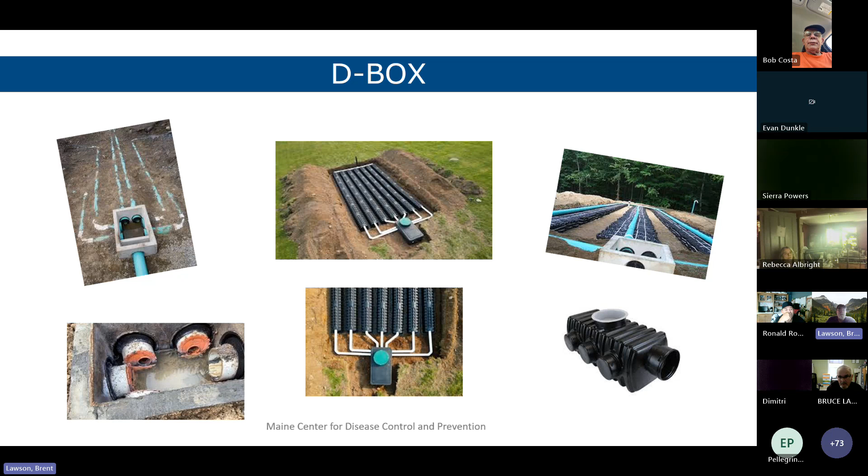There's different D boxes right there. The way they're hooked up, some are huge, some are not. But that's basically what it looks like. Your second inspection is now concluded.

Now, holding tanks. First of all, in the shoreland zone, which is mainly 250 feet, and some are more, some are even less, holding tanks are not allowed in the shoreland zone for a first-time system. That's it. There's no variances, no nothing. No holding tanks are allowed in the shoreland zone for a first-time system.

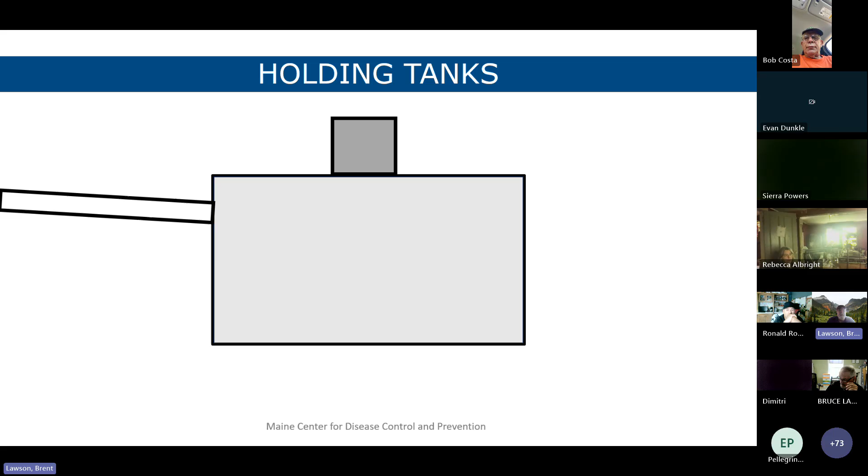Now, once you get by that, then, of course, risers still apply to holding tanks. So you got the holding tank, you got to have at least a riser that facilitates pumping. Again, so it's easy to find it, and so the pumper can easily find it for pumping out. So there you go. Bang, bang, boom. You're done. No digging it up, no extra cost, nothing.

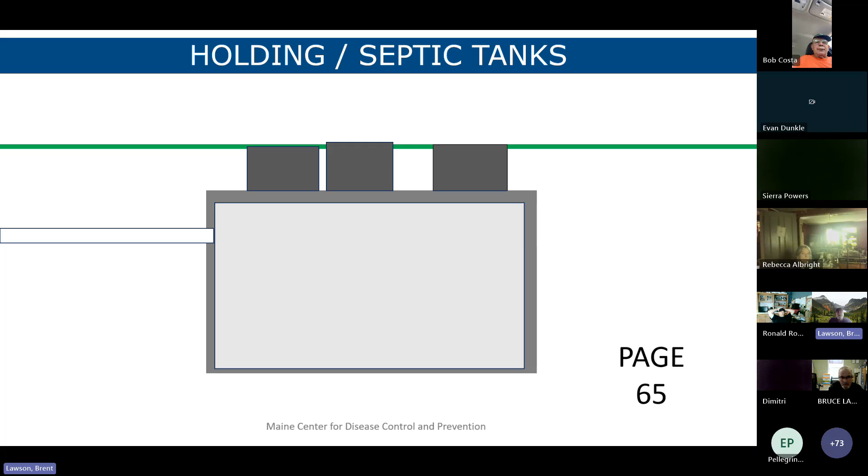So let's say septic tanks. Now, I know a lot of tanks now come just with the 2 ports, one on each end, instead of one big one in the middle and the little rectangle ones at the end, which is great. But holding tanks, again, or septic tanks, if they come like this, have to have at least one riser to grade.

Holding tank. Now, it doesn't really matter which end on the double one, as long as it facilitates easy pumping. Now, of course, if you have a septic system and you have the riser over the filter, but it still facilitates easy pumping, that's okay. But as long as there's at least one going to grade that they can pump out and change the filter, easy.

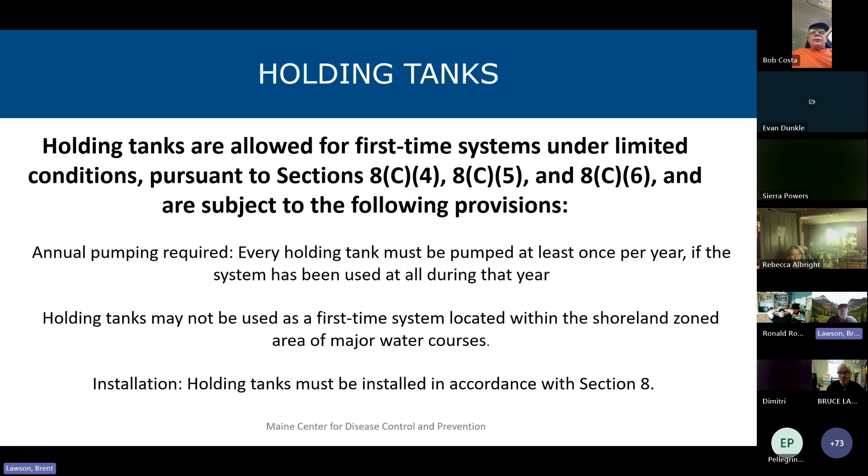Limited conditions, that's just holding tanks in the shoreland zone. Setbacks, holding tanks have the same setbacks as septic tanks. Same thing. Alarm provisions. Holding tanks have to have alarms, audible and visible, and they have to have a pumpers agreement. Any holding tank that gets put in has to have a pumpers agreement.

Again, just discontinuance of holding tanks. It's the same thing as septic tanks. You got to have them pumped out and just cleaned out before they get crushed.

Now, as far as sizing the holding tanks go, sizing a holding tank is 7 times the amount of gallons per day. So if you have a 3-bedroom home, 270 gallons a day, times 7, so you got to have a 1,890 gallon tank, which is basically a 2,000 gallon tank. Now you can have either 2 1,000s or 1 2,000. I would think that would be more practical if it could fit in there. I would say, as far as a holding tank, a 2,000 one would be more.

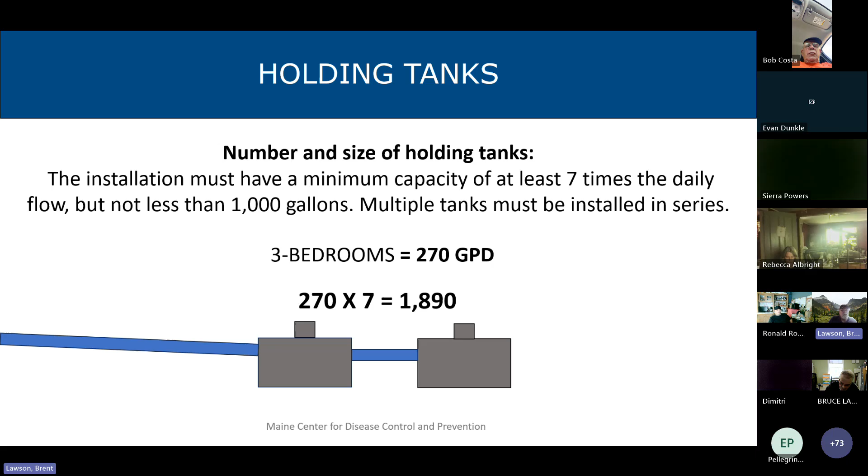Because if it goes like this, that first one has to fill up with solids and everything. Before you get to pump it out, that first one's going to be getting kind of full, but the effluent is going to go into the second tank. So basically you're pumping out solids in the first, effluent in the second. So probably 1 2,000 gallon tank, I would think, would be better. That's just my opinion. But again, they both have to have risers on them if it's like that. Again, discontinuance of a holding tank, they got to be pumped out and crushed. Same way.

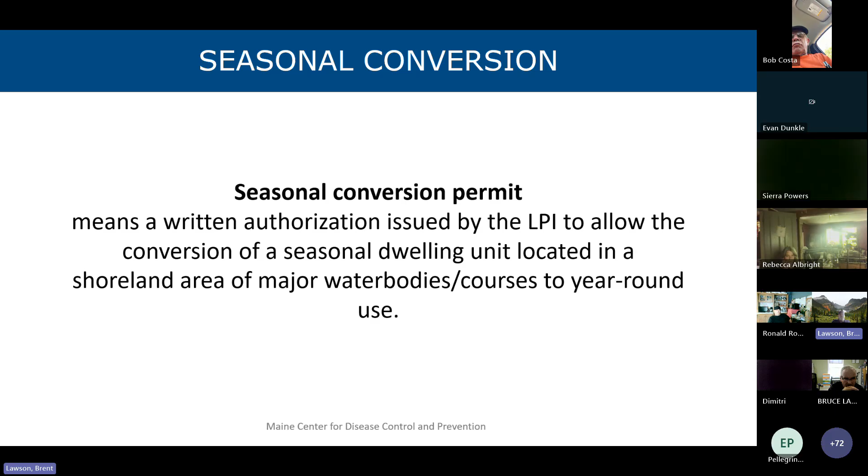Seasonal conversion permit. If that has a holding tank, a seasonal conversion permit cannot be accomplished. It's got to have a full system. $50, and $12.50 goes to the state. Seasonal conversion permit. If you have a system that has a holding tank, like we just said, that cannot happen.

So if somebody wants to convert their dwelling into a year-round dwelling that has a holding tank, a site evaluator has to come in and do, first of all, a replacement system for what's there. But to do a seasonal conversion, that replacement system has to meet the LPI's authority under the replacement table, like setback. For instance, a first time system's 100 feet from a well. In order to do a seasonal conversion, that replacement system would have to meet 60 feet, which is the LPI's authorization to approve it.

Let's say it's a holding tank, but that holding tank was the first time system that was put in there a long time ago. Let's say it was put in after 74. The system that replaces that holding tank would have to meet first time criteria because they're replacing a first time holding tank.

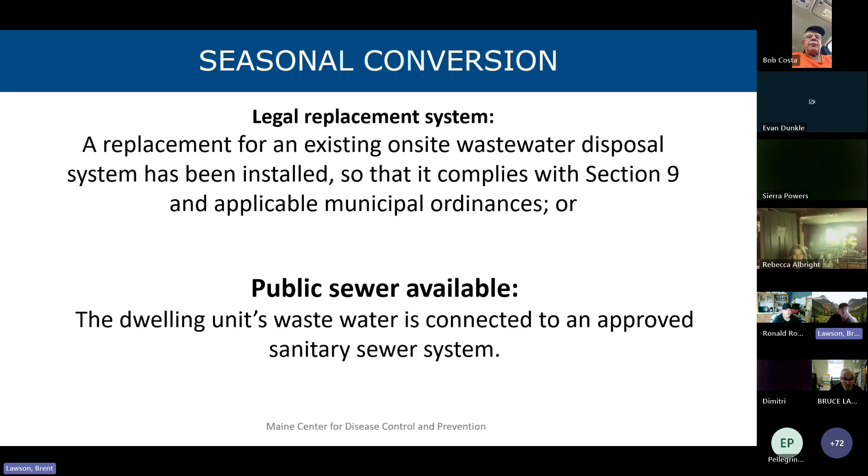Seasonal conversion, did all that. Existing legal system, we just talked about that before. Legal replacement: I guess if public sewer is available, they can tie right into that if there's a holding tank. We just went through all this stuff, like with that public water supply. If it's 100, you go down to 60 feet. Are there any questions about seasonal conversion?

I'm not even paying attention to the chat thing. Let's go back a little bit on the chat.

Let's see. Larger D-box or pump systems help with this. Possible. "I thought holding tanks were not allowed anywhere as a first-time system." No, in the shoreland zone, they're not. You cannot have one. But if you have a holding tank ordinance, or that's the only way it can be. So, like the ordinance rule, we do have in our rule book a holding tank ordinance, or online, that one can follow, and they can put in a local holding tank ordinance, or it has to be approved by the state. Either way, again, all of this stuff is up to the site evaluator.

If they give you a design with a holding tank in it, it'll probably have to have a variance from the state if you don't have a holding tank ordinance. It's right in the rule book how a holding tank ordinance works. There are different steps you've got to take so you can put a first-time holding tank in, but you'd have to follow all that. I don't have my rule book popped up right now, but just take a look at it and familiarize yourself with it. If you do get a holding tank design in, I would go over those rules, what it takes to permit it. And then if you have any problems, just give me a call.

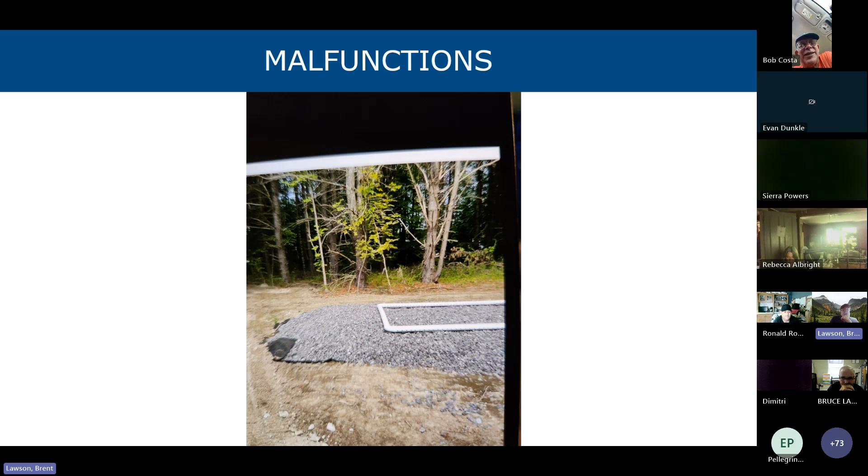Here's a recent system that was put in, and I'm sure you can see that the filter fabric is not quite where it's supposed to be. So I think there's a bigger picture here. And that is a picture of the filter fabric. That filter fabric is not filter fabric. That's like landscape material. So nothing's gonna go through that. The contractor says, well, they didn't want weeds coming up through the septic system. That's why they put that on the bottom.

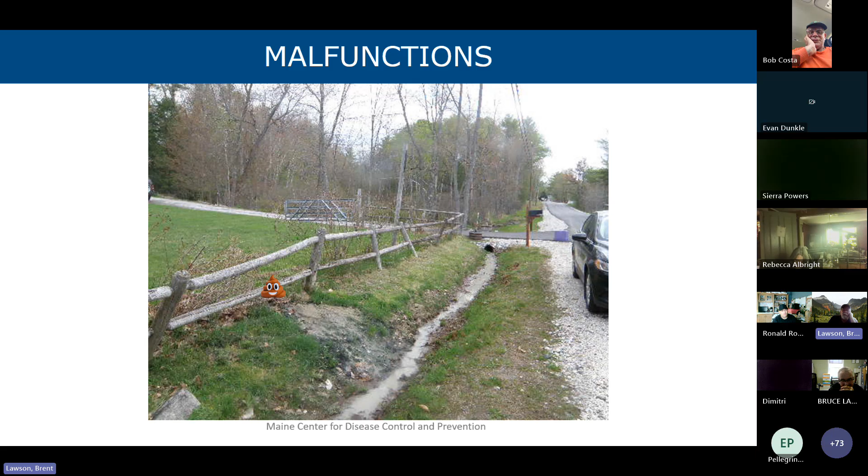But yeah, there won't be any weeds coming up through it, but there won't be anything going down through it either. So yeah, that's a no-no. Here's a system that I just happened to be driving by, that's my car right there, state car, and there's a malfunction, and it comes right out and goes right down, and it just keeps on flowing down to the numerous neighbors below them. So yeah, that would just happen to be a drive-by

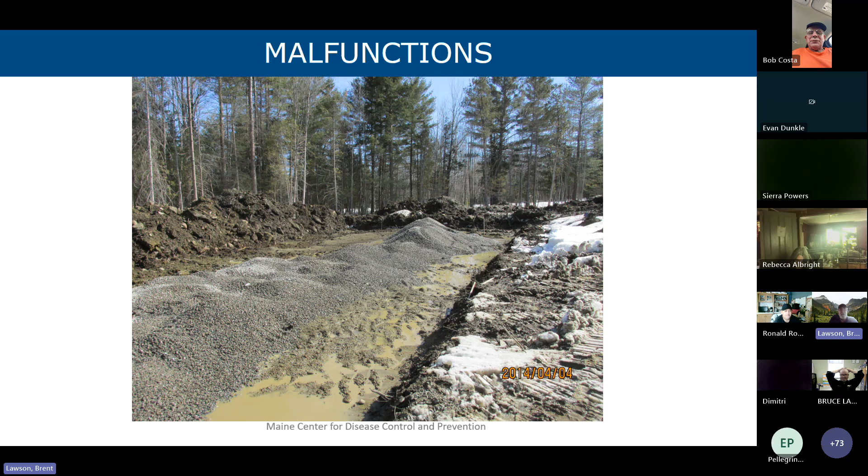thing. This is really not a malfunction. This was a first inspection and the plumbing inspector got called on. And we got there. Well, she got there. And they called me. So we both went out, and there's really nothing there to inspect. All it is is a bunch of piles of rocks on top of mud. That was at the bottom of the hill. You know, the site evaluator and the contractor should have known better before they even started, but they didn't.

Again, here's just a brief description of what's supposed to be there. 4 inches of topsoil. Again, these are just minimums. 4 inches of backfill. You've got filter fabric, at least 12 inches of stone, and there's your biomat and stone and the bottom of the bed. So there's your basic cross section.